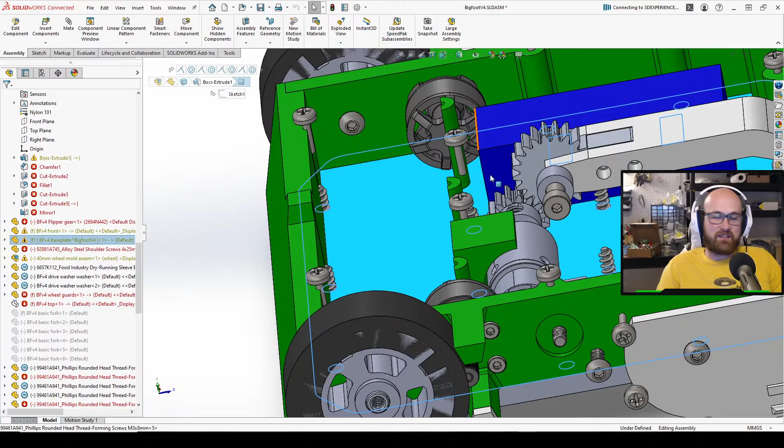Also, apparently I just broke everything. Okay, let me just fix this. Oh my god, what have I done?

That one I want to change because I was changing the side and I accidentally broke everything. Oh god, what have I done?

Oh god. Jesus Christ.

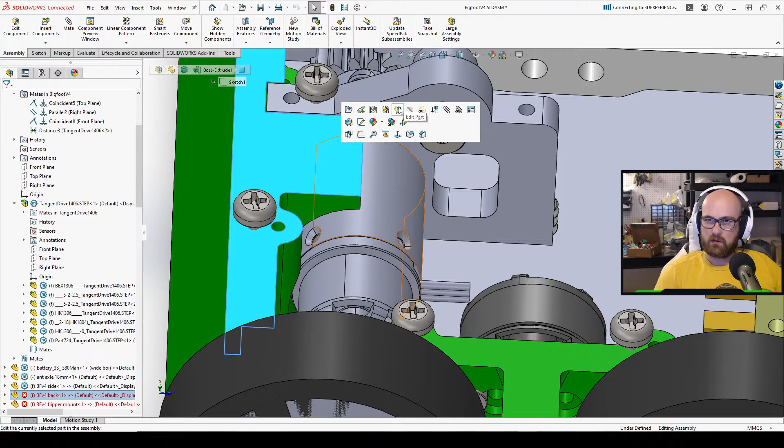I didn't realize anything was based on this motor. Oh no, what have I done?

I'm realizing I'm gonna end up moving the whole robot forward. That's interesting.

But because I used this as the center, thinking that everything would be, I guess it is still centered around it. This is fine. I think I just have to change this, it just has to not be symmetrical I think.

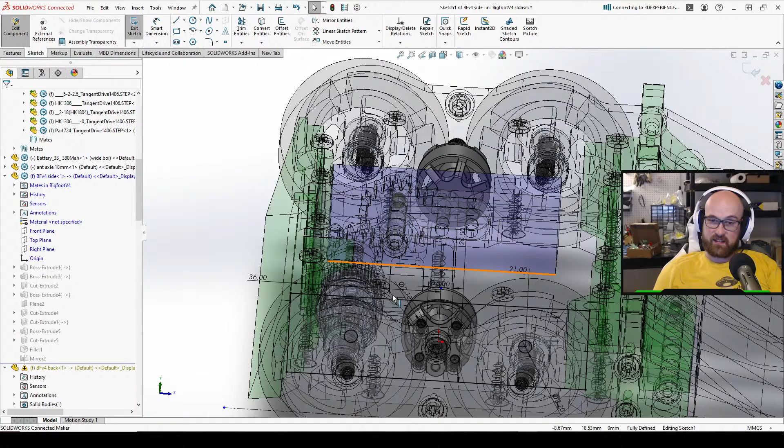Oh yeah, it didn't do so great, it went 2 and 2. There's a few things that I probably should have fixed. The 2 fights I lost, it got stuck with the forks on the wall, and then it got stuck on the back wheels, kind of like this.

One second, oh god, I still need to fix some stuff. Okay, it was stuck with these forks on the wall, and this was touching the ground, so the wheels weren't touching the ground. So I need to push the wheels back so they can actually touch the ground when it's like this.

And also, I accidentally turned on stall protection for the ESC for the flipper, so the weapon just kept turning off. That was a huge problem in the last event. That, and the flipper not going all the way down.

Yeah, I do need a... Yeah, I actually never got to use this wedge during that event, but... Let me see if I can do this without breaking literally everything. Yeah, I actually didn't get snagged too much with the forks.

Figure out... Oh, that worked, I think. No, that made that shorter too.

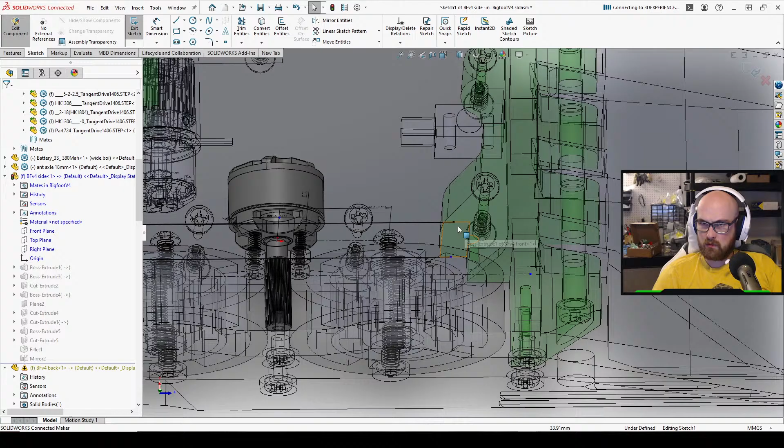Trying to figure out which relation is determining this. The relation to is this half that I'm trying to break, I think. So if I do this...

To be honest, kinda, I mean this uses brushless motors. Oh, that's not what I want to do. Because Necessary Evil Kit uses a gear, and I think brushed motors.

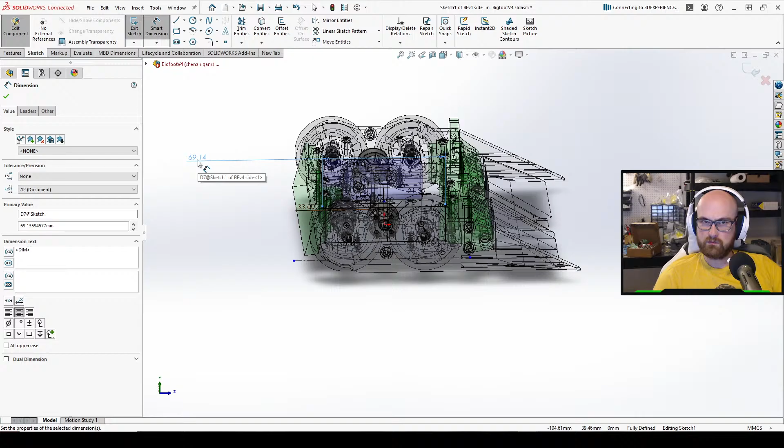Not exactly the cleanest way to do that, but... So I basically just broke different things. Although somehow this feels less broke. Okay.

You're gonna fucking lose it.

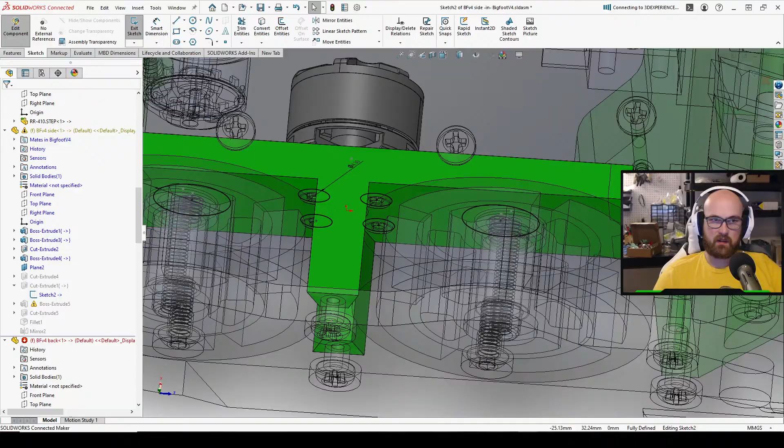The problem is so many of these mates are all so goofy. I just sort of didn't fix them.

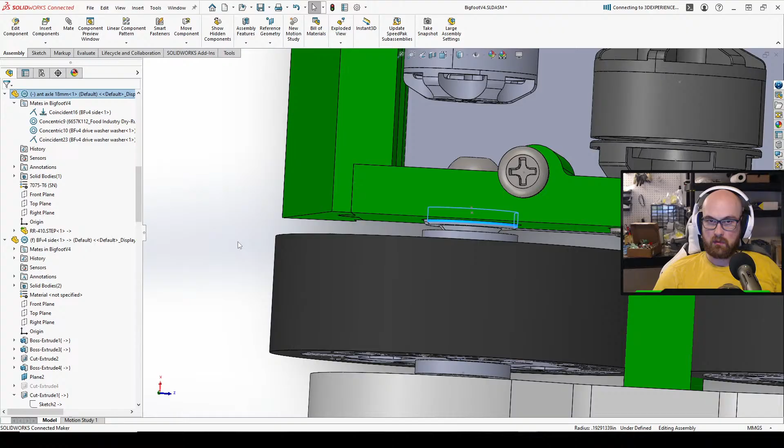That's now okay, that's concentric. Okay, so the sides are fixed for the most part.

Now I was gonna get rid of these because they seem to get more in the way than anything. I'm just gonna get rid of them, and they didn't really hold the robot together better.

Yeah, unfortunately, Bigfoot dropped in rank last weekend because the robots I went against weren't well ranked at all, and since I kept losing, I ended up only losing rank. Oh, I forgot to wake up, so I technically didn't lose any fights.

Oh, that's a rough way to not go to the event.

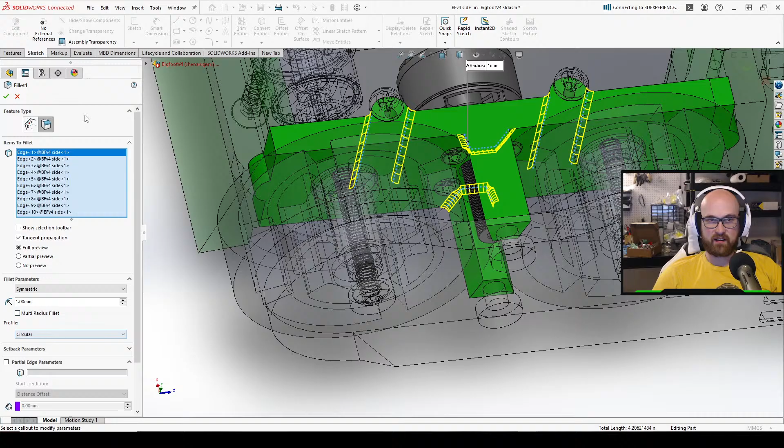Lost your sleep schedule. Yeah, pretty much. I'd be so upset. Oh, I couldn't only imagine. I'd be pretty pissed if I ended up sleeping through an event, or even through safety and whatnot.

Considering how much prep work goes into an event. Okay, so that's been solved.

Okay, what? Oh, I was using distance, wasn't I? Although I moved is 3 millimeters. I moved everything, that means I have to reduce this by 3 millimeters.

So we're still good. We're still good. Okay, now the question is, okay, this I have to.

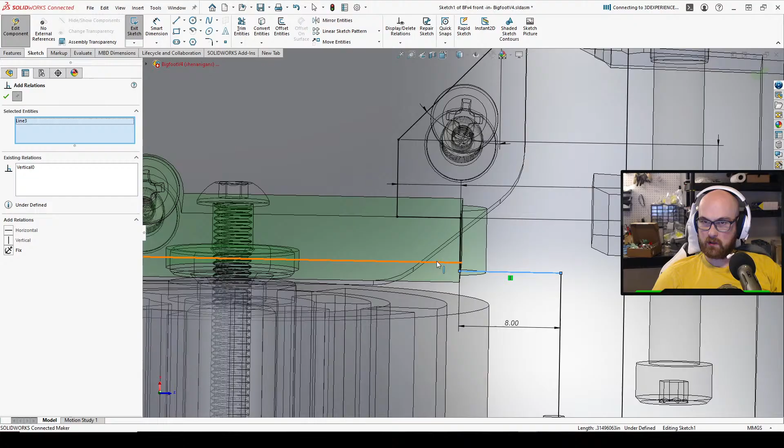Angry with me? Yeah, we're gonna reduce. I guess we could probably reduce this by. Wait, what? What?

Trying to figure out what the hell this is trying to do here. Okay, that's.

I think this should be defined by this instead. There we go. An event. Didn't unpack. Oof. Yeah, that's rough.

I may need to change some dimensions on here if that's... or I'd have to change some print settings. Yeah.

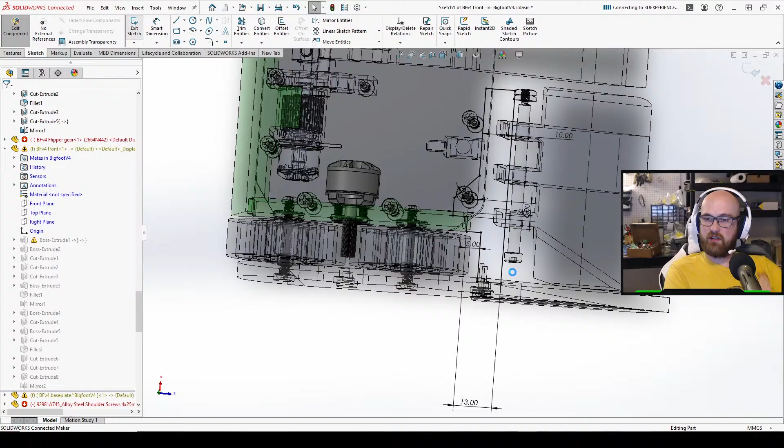Yeah, even when I have to basically just... why I don't unpack, like... Oh my god, that's thick. Think about that.

Should all be fine. We're gonna have to edit the feature because instead of doing up to surface, we're gonna do blind, because there's no reason for it to be that thick.

Okay, so I moved it back 3 millimeters. That should be enough, right?

Because I feel like there's still a position. I feel like there's a... I still reduced the angle.

I like how speedy it is, and it worked pretty well in the last event, the tangential drive. But I haven't really been able to test... I guess, how should I put this? I have concerns about how much torque it can put out, like the pushing power. But the speed and reliability has been pretty good so far. I had no drive issues.

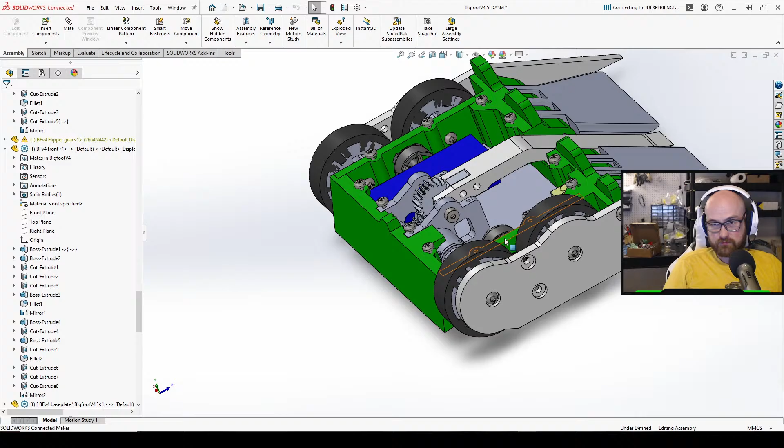I may need a little bit more testing before I really give a strong answer. And I do have doubts on if it'll scale up to, like, Beetle, because of what I mentioned about pushing power. But on an ant, it works pretty well.

Okay, so this is currently... I think this is actually good enough, because it is now currently... Oh, like the angle. I don't know. I don't think of what angle it'd have to be at to, like...

I just want to take a look at something. We're gonna just make a line, and then we're gonna make... I don't know why I'm using a center line. It's not like I'm gonna use this for anything. It's not like I'm gonna accidentally do a sketch. Oh, that's not what I want to do.

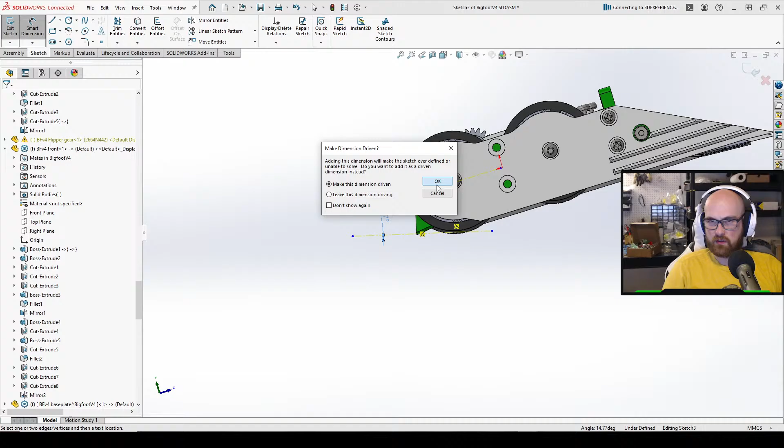But yeah, I think when I scale Bigfoot up to a... maybe that isn't... because that's a... make this driven. There we go. 14-degree angle.

Maybe I need an extra millimeter on that. We're gonna have to... I think I should only have to change one dimension if I do, because I think I changed everything else in such a way that... because if we give it 1 more millimeter.

Interesting, that only changes like a degree.

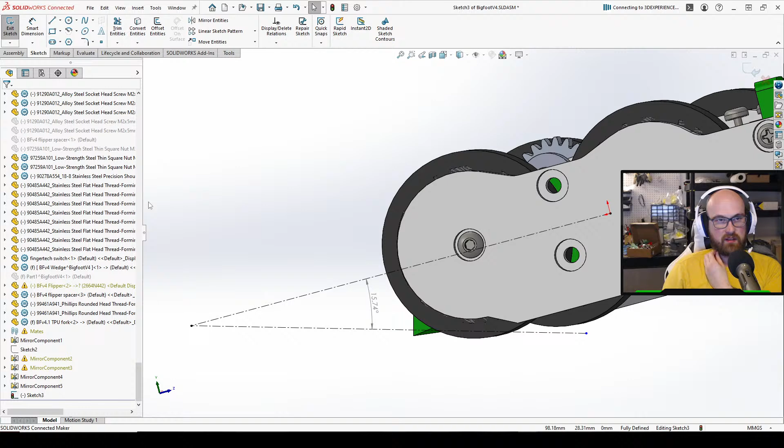How much spare weight does it have to make with the weightiest attachments? With the heaviest configuration, I'd like no weight to work with, and that was with a titanium top plate. I'm like 150, and that wasn't with the wedges. That was with like the little forky wedges.

Just edit. So with the other one, that's not how. The... let me delete the, there we go. Let me delete the line. I need to make this.

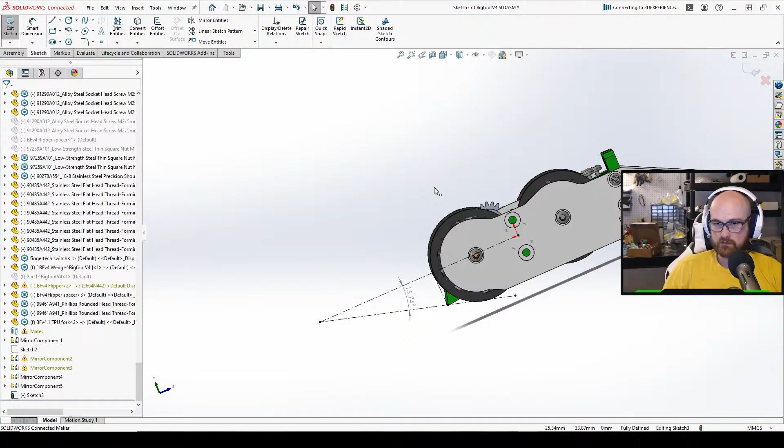Debating if I should just push this as far until this is almost hitting this can. Like these are touching.

I'd use TPU forks for ant weight, which don't use external springs. It's essentially just the springiness of the TPU. I'm not sure if anybody uses spring-loaded forks for ants. I've also not paid that close attention to who's using spring-loaded forks. I think also once you get to an ant weight, you don't have as much weight to do that sort of thing with.

Oh, I didn't realize I was still in the sketch. There's something else I really want to... let's just go to 30. We're going to make the wheels in the back. Actually, no, I don't think I want to do that. That's too much. We're already doing... 4 millimeters is already a lot. I think we're going to hope that's good enough.

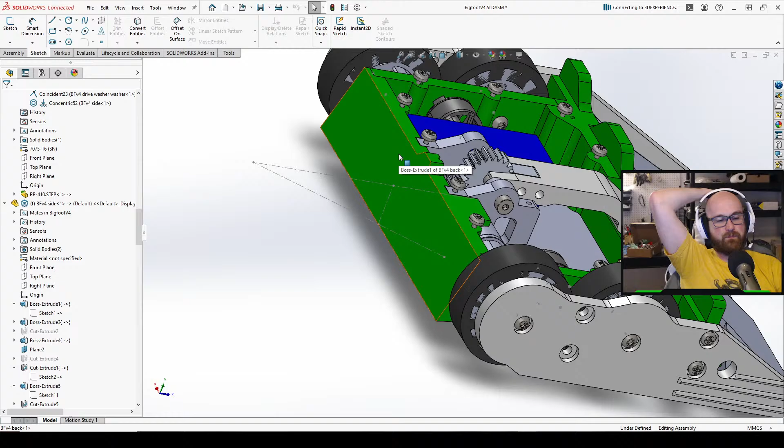Clutch, I don't know if I'm going to. We'll see. I think I'm gonna try to just remove... ooh, what the hell? I'll fix that in a second. I think for now I'm just going to turn off stall protection and then run it like that. And if I continue to have issues after I get rid of stall protection, I might do something.

Yeah, I'm going to try to get away with not doing that, but I will keep that in my back pocket if I continue to have issues.

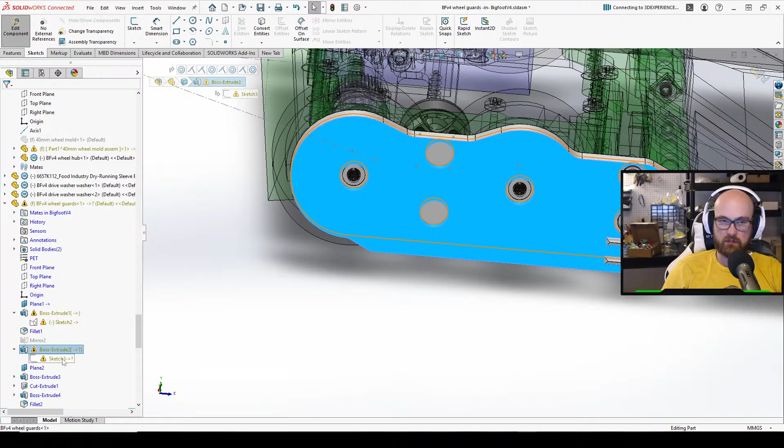Oh, I'm just gonna get rid of these holes anyways. What? Gonna not touch that. Oh, it's because these aren't equal to that. There we go, fix that. Okay. Those. Be good enough for now.

Now do some chicanery. So we don't have enough room for the electronics, and I have a creative solution for that. Actually, I don't think I need to say.

Fluke. So in addition to trimming some of the wires so that I am gonna... it would be named after another cryptid. I've made a lot of bots, and I always have another robot in the pipeline, and it's always a cryptid name.

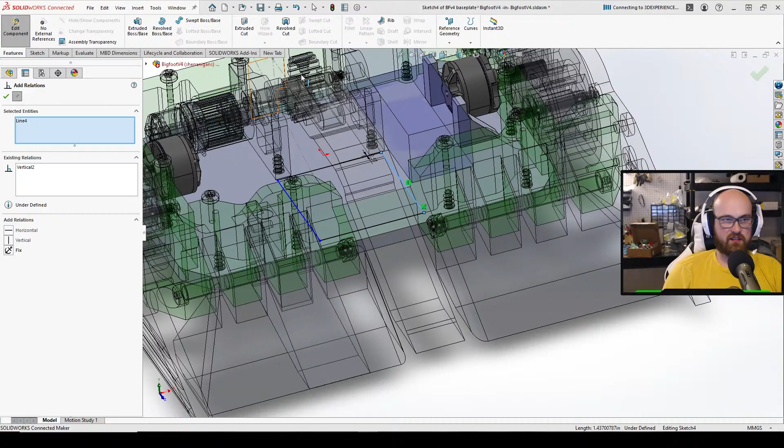I think Skunk Ape is going to be the next one named, which is another one of the many names for Bigfoot. Oh my god. But yeah, Skunk Ape is what I was thinking. Which is kind of a terrible name in my opinion, but I think that's why it's the right choice.

That's definitely going to break at some point. Definitely not up to any surface. Definitely not that much. Because this is a pretty thick bottom. Millimeters? That feels like a lot. 3 millimeters feels like I'm playing with fire.

Granted, if anyone hits this, I'm basically cooked. But I'm probably gonna have... we'll see. It's not. I don't... it's if it comes back, it's gonna be a dramatically different.

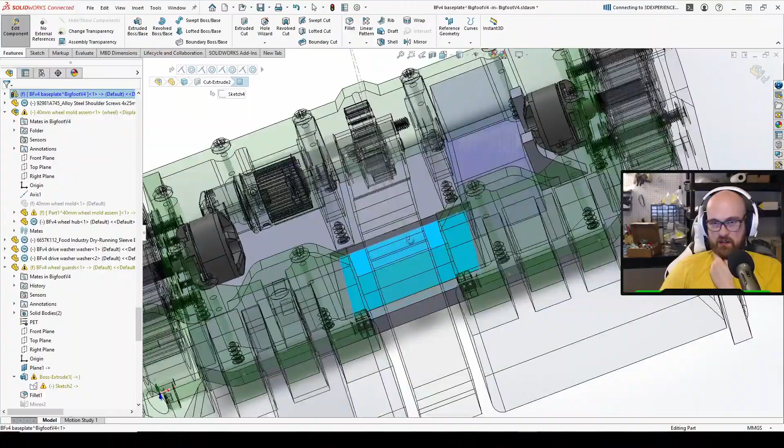But if I ever make another undercutter, it's just gonna be Wendigo, an alteration of Wendigo. I think Wendigo wasn't entirely too narrow. There was just some goofiness with Wendigo. But yeah, when I do this, that section where it's pocketed is probably gonna end up being basically 100% infill.

So for those of you that were worried.

Okay, now other thing I was gonna do.

Chaos splits, I'm not familiar. I've definitely heard of chaos splits, but I'm not thinking of it currently. What is it? Showing weird stuff. I'm gonna hide that for a moment. Okay. Chaos splits, I'm not familiar with that one.

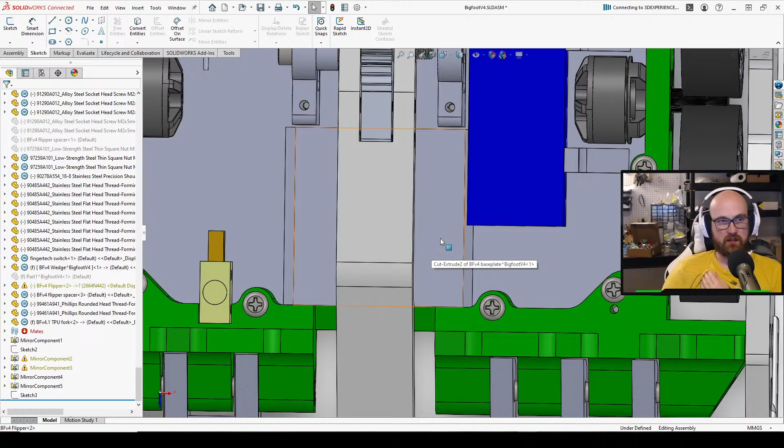But yeah, I kind of like the idea of making an undercutter. Okay.

I don't know why it's called Shenanigans. I don't remember what... oh, I think it was called Shenanigans because I did... oh God, no. Never mind. Oh no. I just realized I did all this in a configuration where I did Shenanigans and called it Shenanigans. This was supposed to actually be.

Okay, let me fix this real quick.

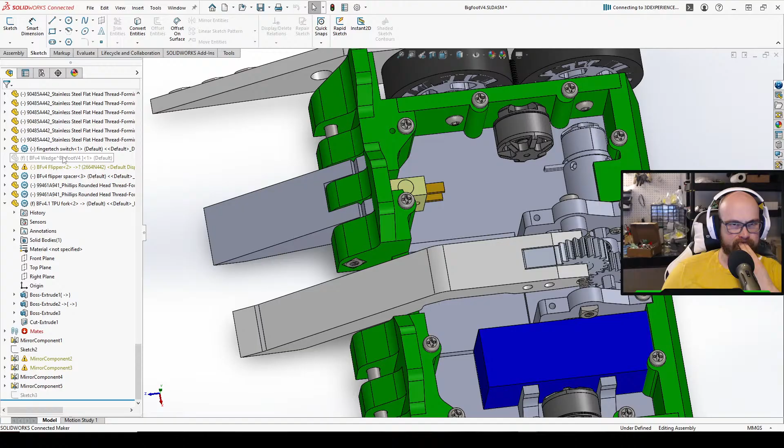I think there's a version of this fork that I made and printed, but I never saved.

Our four-wheel drive vertical killer. It sounds like a lot of different... wait, five. It sounds like a lot of different verts that I've heard of.

I feel like what every vert tries to do these days is be a killer vert with ground game. Wait, that's not what I'm... okay.

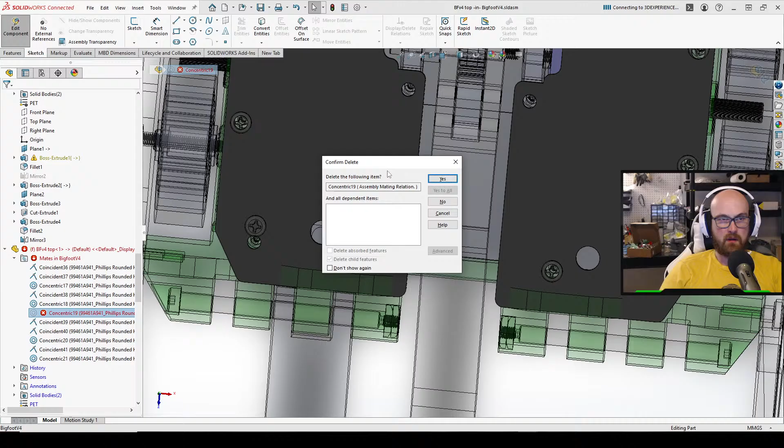Oh, kills the... okay. Four-wheel drive vertical killer with ground game. No, I meant the bot that kills vert meta. Okay.

Now I'm trying to remember what you're talking about. Okay, it seems broken. This is...

Sure what's going on here, but all right. Okay, that's weird. All right, but...

It seems like every bot currently is either a four-wheel drive vert or a reaction to a four-wheel drive vert. And I don't see that changing anytime soon.

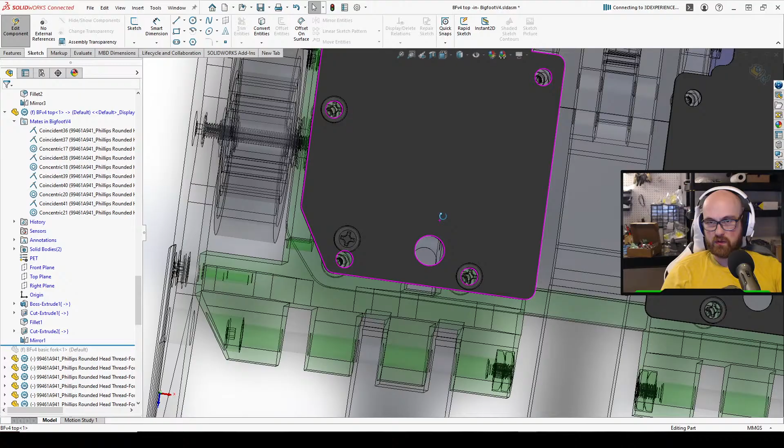Even like an important feature. Also, that looks a little bit naked, so... that a little bit. Okay.

Okay, I need to create a new configuration. Four-wheel drive egg beaters.

I'm pretty sure we have enough four-wheel drive egg beaters. I feel like saying you want more is a pretty controversial opinion, because I think we have enough of them, and I guess there shouldn't be a shortage of them. Actually, no, what am I doing?

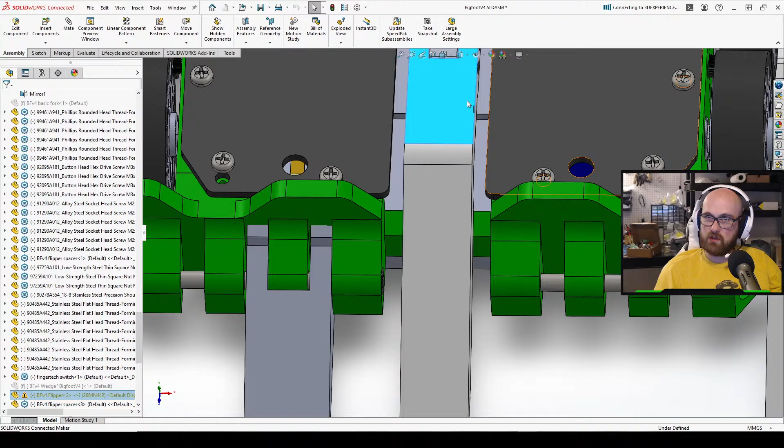Yeah, I feel like that ends up happening a lot of the time. You end up dialing in drive, which is kind of an important thing, and I think that was an issue I had with Hodag, is that I pretty much never got the chance to configure it. I never really got the chance to dial it in, because I was so focused on... not sure it's going up to yet. But yeah, because I had to focus so much on getting the actual robot to work, the drive always just had to be good enough.

So, for those wondering what I'm doing, I was basically creating a new robot based off of Bigfoot that is a vert. I originally wanted to use the weapon off of Hodag, until I realized the weapon off of Hodag is heavy as shit. And where's it? 28. I thought I had a 2822.

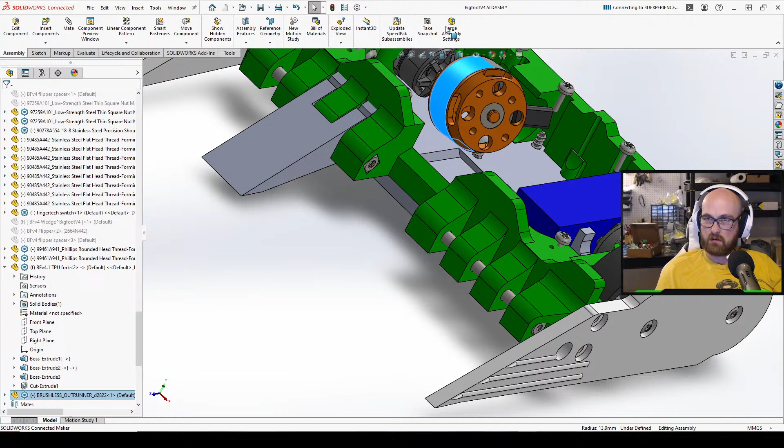Let me see something real quick. I feel like my driving at, what was it called? NHRL, felt a lot more reactionary than at some of the other ones. Because if you see my driving at, like, what am I trying to say, at SEMO down in St. Louis, is very different, or looks very different. Because the first fight at NHRL, I just wasn't driving straight. And then the second fight, I was driving a lot straighter, but going against Buzz Thrill, he was very slippery.

Okay. No, that's not what I want to do. Rename part, I think. Dummy. My music stopped. There we go.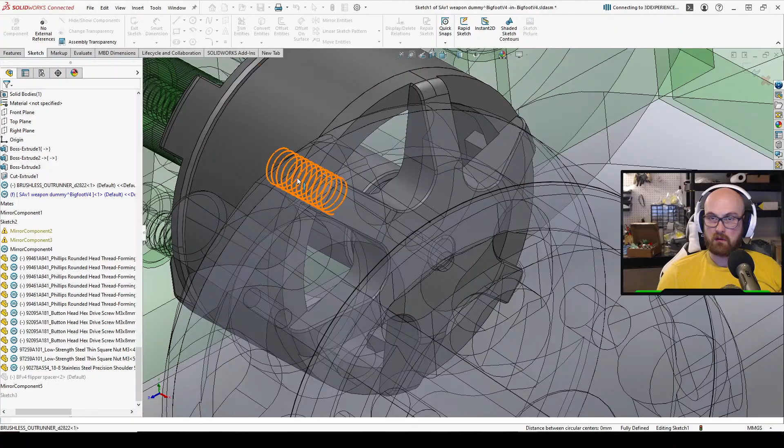Should be 17 millimeters. Other direction though. I'm gonna change the color to make it red, because that's just what I make these dummy weapons. That way it's also a lot more obvious that it's not a real thing.

SEMO was not where I was having the shutdown issue, actually. Actually, it didn't shut down at all at that SEMO event. It was Duluth where I had the most of it. And there was like one RSL where I had issues too.

It's going to have to rebuild every time I move it. There, wait.

Did I put a center plane in this in a good spot? No, in the center plane of this. But yeah, I wasn't having drive issues at SEMO, because the St. Louis one's where I got second.

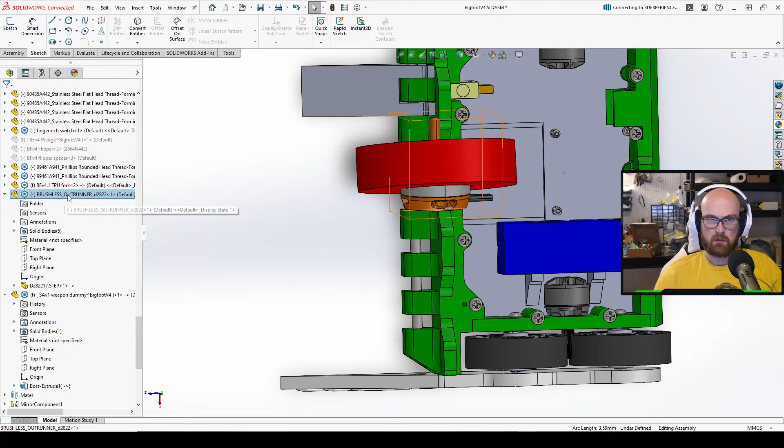Let me try some, I need to make a new sketch into this. Is it an inch to here? Trying to remember which part's an inch. No, it's an inch from here to here. Yeah.

Wait, I was trying to do something. So I wanted to create a new plane. Apparently, whenever I first did this, I didn't create a... Yeah, Duluth is when I discovered the issue.

Are you putting a vert on? Yep. Well, technically I am putting a vert onto Bigfoot, and I am going to call it a completely different robot when it's a vert. Not because I don't want to make Bigfoot a vert, but I want to use what I made with Bigfoot and do other stuff with it, if that makes sense.

And I'm going to call it Skunk Ape, because that's another name for Bigfoot. Because I don't like the idea of it being like, oh, are you going to fight Bigfoot when it's a vert today? I don't like that. Bigfoot's always going to be at least some sort of flipper or lifter.

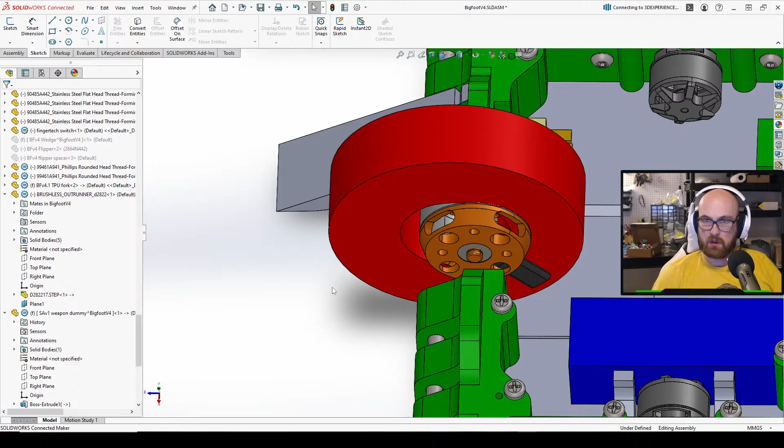I'm thinking about how I want to mount this. I think I'll mount it kind of like that. I need to create another plane, because apparently whenever I first did this, I didn't really do anything smart when I made the mate. I didn't actually create it, I guess.

Yeah, I think the best way to do it is to not use the same uprights. But that's just my opinion.

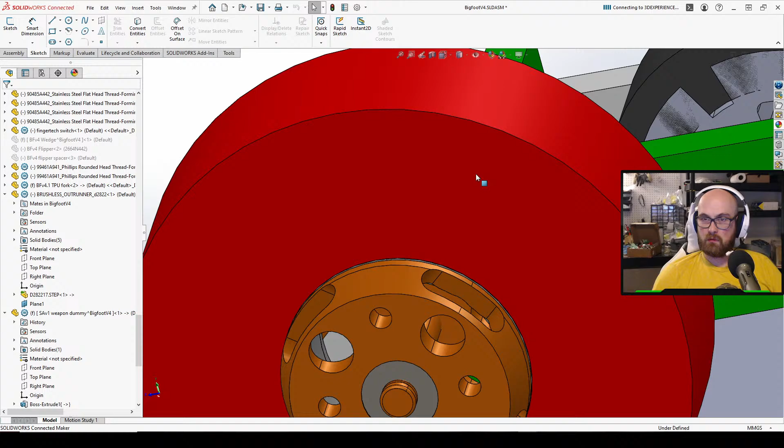Not what I wanted. Let me hide this for a second. The front plate.

So I'm debating, I don't want... I think it's going to end up having to be a bit forward because I don't want to have to cut out of the bottom plate. Yeah.

Thin repeat hub. Yeah, the thing is, I could probably do that. I might end up doing the repeat hub, but I didn't account for the weight of it. So if I end up doing more with Skunk Ape, I'll use the repeat hub. I just didn't feel like cutting out because I would have to get new weapons cut, since the weapon on a Hodag is like 3/8 of an inch, and I need like 1/8 of an inch, which would probably be better.

Yeah, you should be... well, you should be. What's that? What do they call that when you're working on something with someone else, and they're working on something at the same time? You need to be like co-working - we need to be working at the same time. This is supposed to be your motivation to actually be doing it. This is the exact time you should be working on your robot.

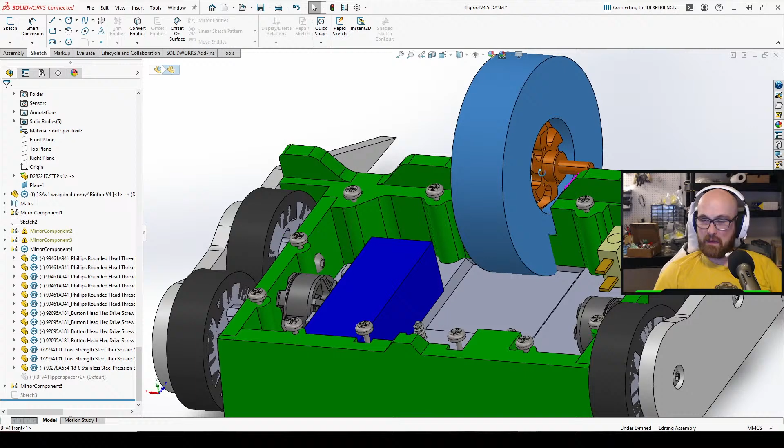Okay, so I may have to cut out a little bit out of the bottom, or the weapon's just going to be entirely too far forward.

Nice, what's the new beetle? I'm trying to figure out how I'm going to make this fit, because I already knew I was going to have to do a different front. Am I going to need a new side too? Is the only thing that's going to be the same like the sides and the backs? Because I could probably just do a new bottom.

The spreadsheets are telling you it's impossible. Oh no, you gotta listen to the spreadsheets.

SRO is going to the RSL September event in Nebraska. Okay. Yeah, I'm trying to bring both Skunk Ape and Bigfoot to the next RSL event, because the next RSL event is going to be my next event. And then I'm going to try to go to that one in the Chicago suburbs.

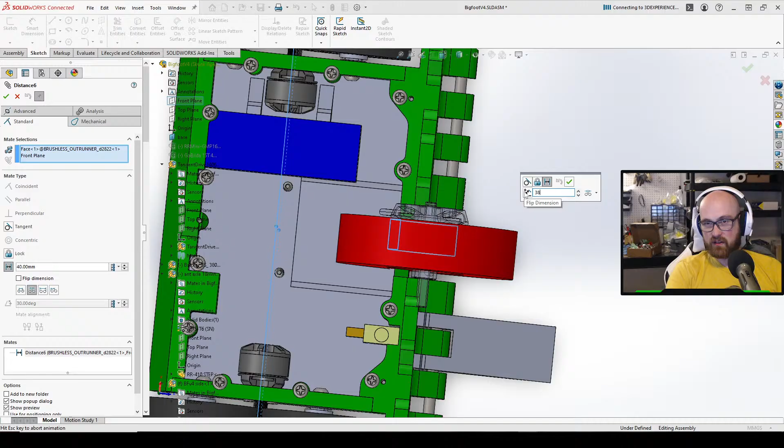I think I have to bring this closer to the center of the robot, mostly because I just pushed the drive back.

I've never made a normal vert - this will be my first normal vert, and it'll just be me slapping a vertical spinner onto this. So this will be fun.

Trying to... yeah, because I'm mostly concerned about where the weight sits, that's my biggest concern.

Yeah, I guess I'll have different bottoms for each of them, and the main difference will be that, if need be, I'll just cut holes in the Bigfoot one if we get desperate.

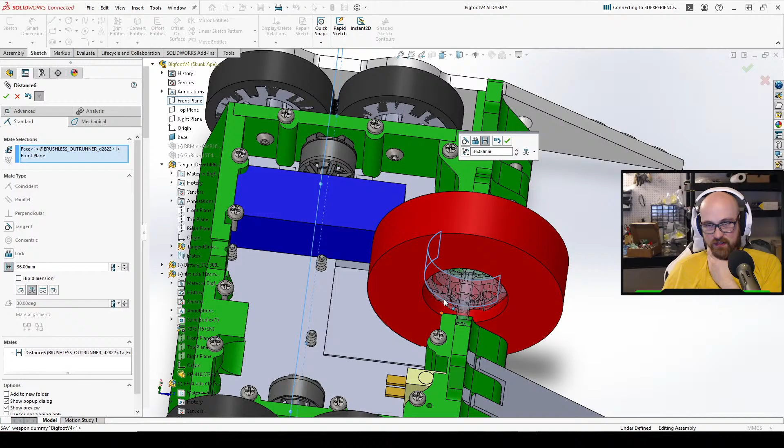Your Discord message said SRO. Said SRO. Unfortunately, I didn't realize.

Oh, this - oh okay, that looks a lot like Doppler. Showing the CAD without showing everything on my Discord. So it's both of those - it's both a vert and a horizontal.

Big Teak. It's a fine weapon, I guess. I don't think it's gonna be as good of a hot swap as I thought - as Big Teak is not gonna...

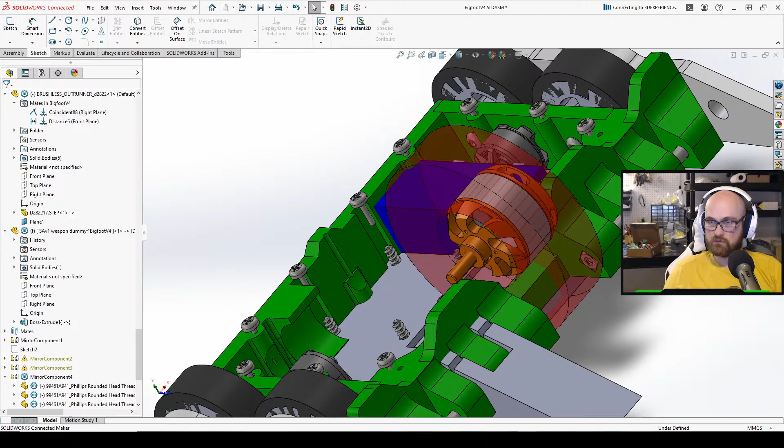That to the... obviously not tangent to it. Do a distance mate. Do 6 millimeters from the bottom, maybe. Good enough.

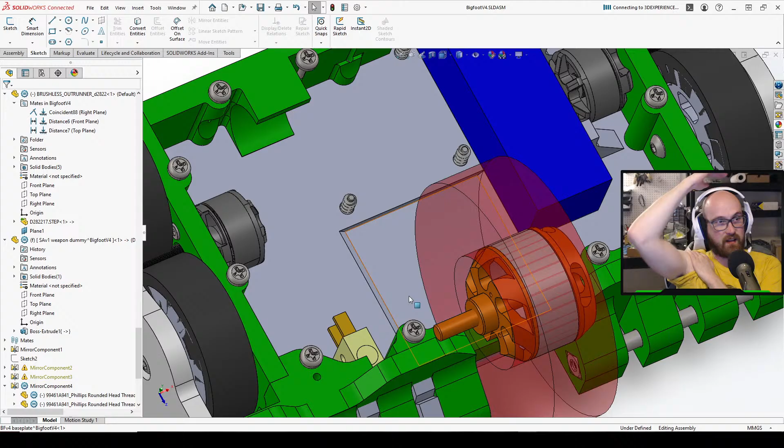I did the math on how much weight this is gonna require. This is gonna add about 80 to 90 grams. And then the flipper is like 60 or something, so I'm gonna need to find 20 to 40 grams depending. But I also have to get rid of part of the front, so I'm not too worried about that, since I'm gonna be using a completely different front.

Not completely different, because I want to be able to use the same forks.

So I think for this, we're gonna edit this part, and then I'm definitely gonna add a configuration to this, because I essentially want... I pretty much expected that this is going to... I can't have the front for the flipper be the same, because of aspects of the front.

I don't think I'll be able to use all the same forks. I might be able to use some of them, because I want to keep the same spacing, but I think I'll only have 2 of these, so I'll basically only be able to use this sort of fork. So we're just going to suppress that for now.

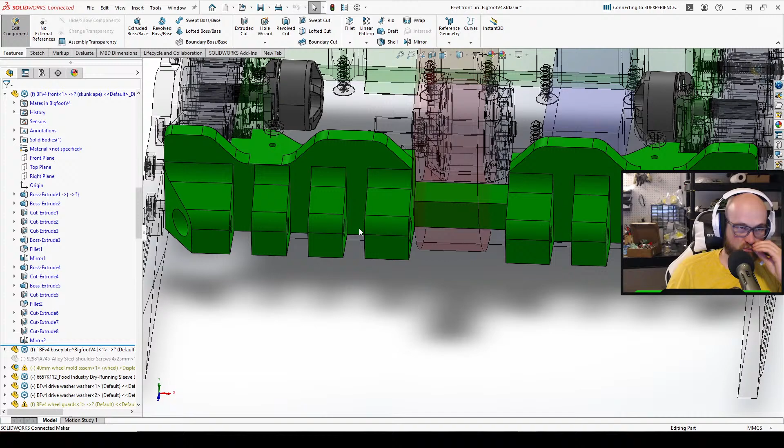I don't like how messy this is going to be. Okay, that didn't break nearly as many things as I thought it would.

It's going to be Bigfoot flipper, or is it? I knew something sus was going to happen. Yeah, I don't even remember... The thumbnail was meant to be for something that was a while back. Flipper, is it? Yeah, because... I think this...

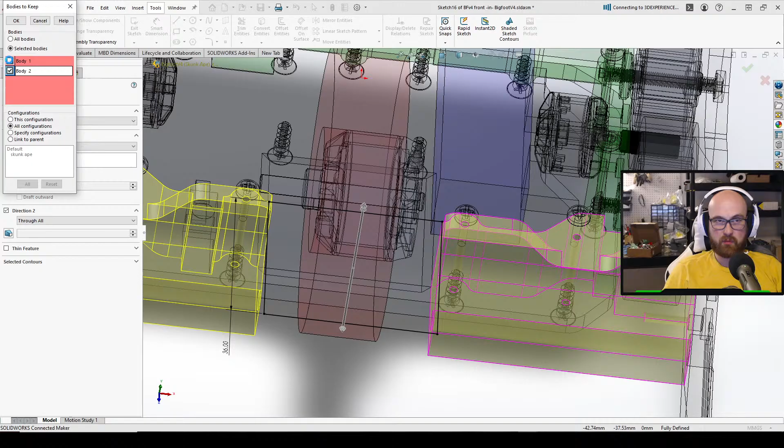Just do through all both. Shh, see, we're already saving weight. Keep both bodies, all bodies. They're no longer one body. Shame. I'm sure in no way, shape, or form will that come back to haunt me.

I didn't mean to show this. Trying to figure out why it was. Okay, let me just finish what I'm doing.

But yeah, I could never make Bigfoot not a flipper. But wrong direction, what are you doing? Oh okay, direction, there we go. A better name. Skunk ape?

Well, it's honestly supposed to be kind of a dumb name, because I feel like it's kind of a dumb idea.

I would not... actually, think about it. I changed my mind on this one. I guess I could probably use all the same forks if I really wanted to.

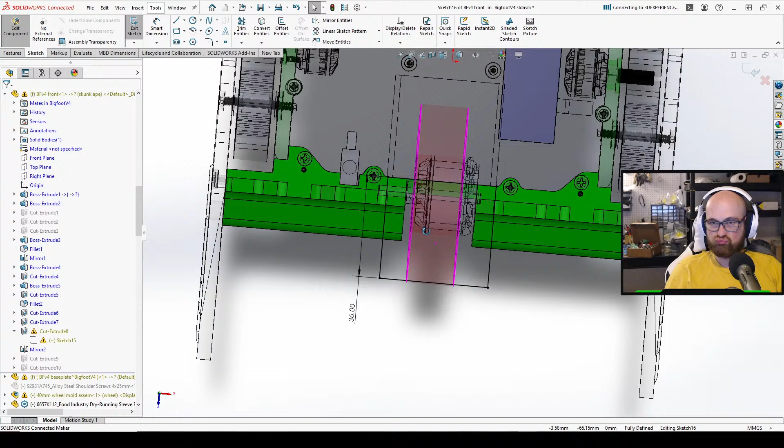The poo monster? It's not gonna... okay, not quite that goofy of a name. The poo monster. Although that's what it kind of sounds like. It sounds like a terrible name. So the skunk ape, like it sounds like it's gonna be a stinky robot, which it probably is gonna be a stinky robot, but not in that way, I guess. That's not the way I hope it to be stinky.

No, I don't think that's where I want that to be. I want it to be further out. I think I want it to be in line with this, actually.

Yeah, I research, I like to... the poo monster. Let me try that. Okay. Interesting. The most mysterious cryptid, the poo monster.

This does feel like a joke name, though, in a way. My phone is blowing up, I'm getting texts. Okay.

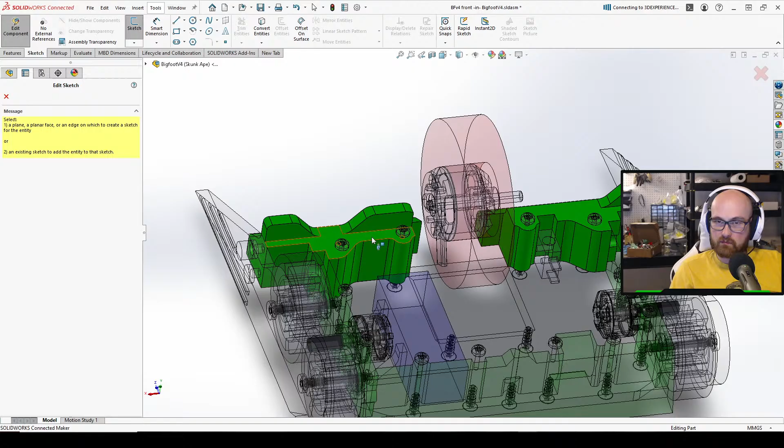Yeah, this is... because I remember whenever I'd look up different names for Bigfoot, skunk ape would always pop up, and it always felt like the goofiest name. I'm like, so this is the goofiest version of Bigfoot.

Tacking on stuff. Maybe I want to keep those, maybe I don't want to suppress that or cut that off, because that could end up being... no, that's going to get in the way of me. Like this, there's got to be screws that got to go somewhere.

I realize I need to, in some way, shape, or form, make this set in one way. So we're gonna... I'm actually gonna do it at a 45-degree angle from that, that way the wire's going straight down, basically. Okay.

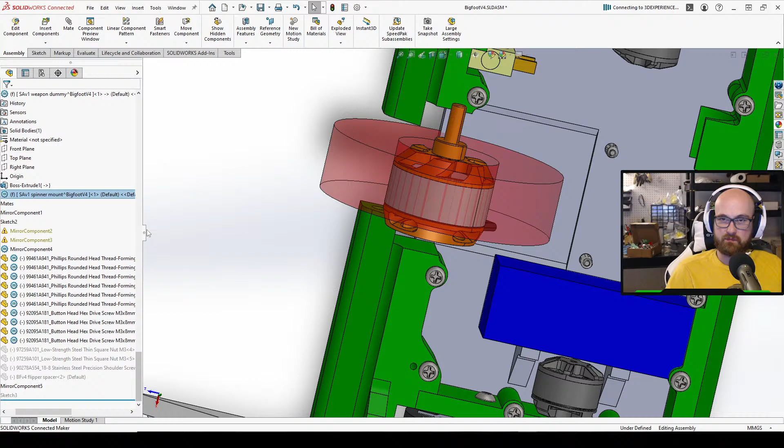Maybe not the most problematic association, basically an abbreviation, but probably not the best.

Actually, now that I think about it, I don't want this. The screw currently is in line with... I think I actually want it to be a little bit different. Let me change this angle.

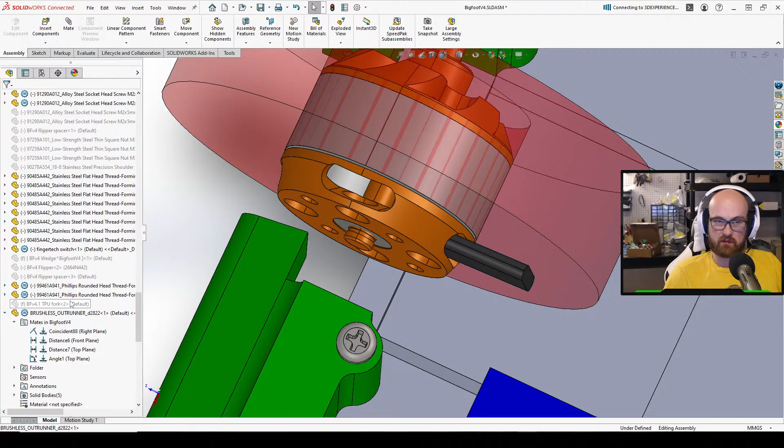Okay, where was I? Other than doing chicanery.

Vapor Lock, Project Beta, Rough House, Nebula, Space Manta Ray. Space Manta Ray a reference? Or no? Okay, convert entities, these.

Because this is going to be our furthest approach, I'll probably go with this one.

Okay, that's going to be in line with the top, that way we can mount it to the top. We might end up doing a new top, but we'll see.

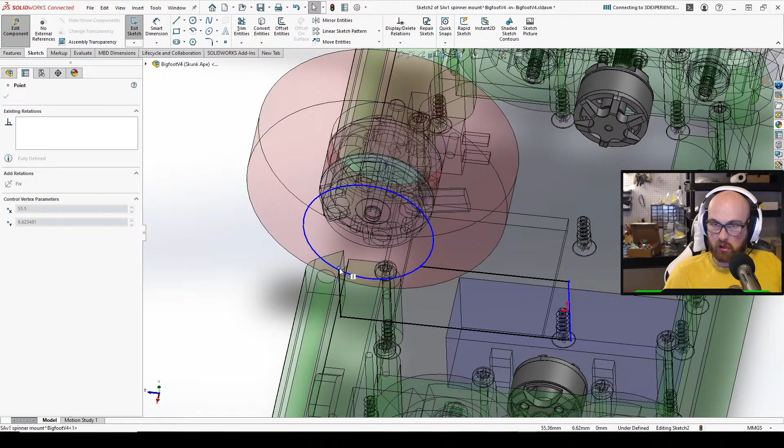Coincident. I think we'll make this about the size of the can. 28, I guess, is the size of the can.

Tasty Plants thing, also kind of a cryptid. Ah. Space Manta Ray, okay.

Whoops, I don't want to do that. I'm not quite done yet.

Oh wow, I don't like that, it looks goofy. We need to just make this tangent to this, and then we can adjust the angle.

60 degrees is a good angle. That's right, it's a respectable angle that makes a normal, respectable robot would have.

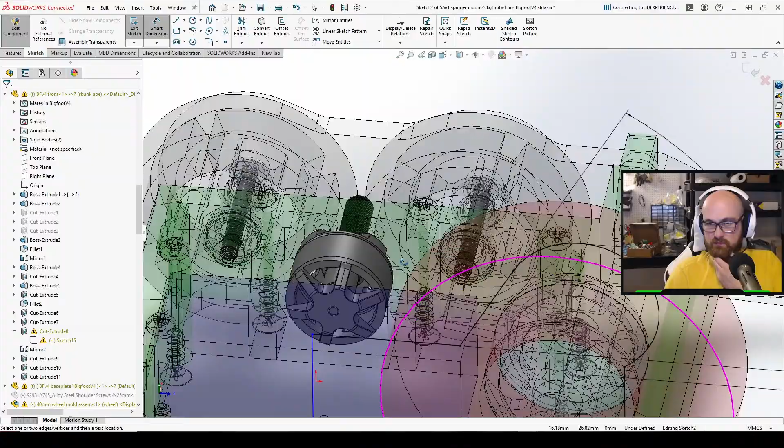I guess I could have the mounting for this just fit in the little pocket I just made. I'm sure there's no way that'll come back to bite me in the ass.

Get rid of that. Well, I'm trying to make this all fit into there.

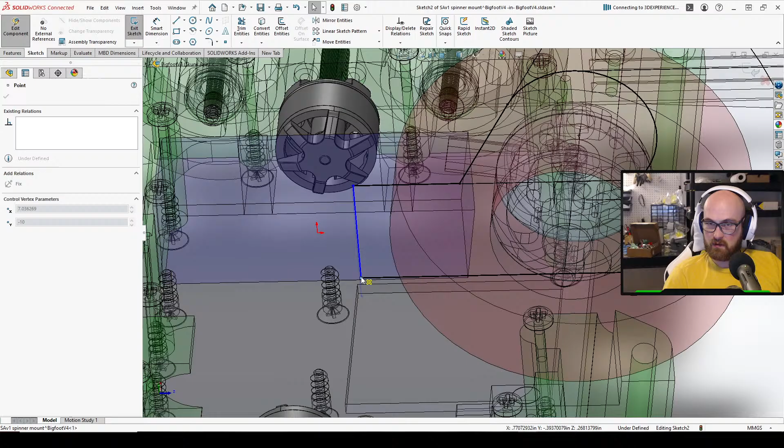We're just gonna do a new base plate, we're not gonna fuck with that. And not a socketed base plate, because that's gonna create a mess. Although I think there might still be, I might make holes for both just in case.

Oh my god, that's kind of funny because they aren't real. Yeah, I do think that because it is a lot easier to make video game robots. I've made lots of things in video games, but it's different when you actually make them. Actually, I haven't made robots in video games, I should specify. I don't know where I was going with that. I'm trying to focus on too many things at once.

What am I doing? I feel like I made this too... that's the problem.

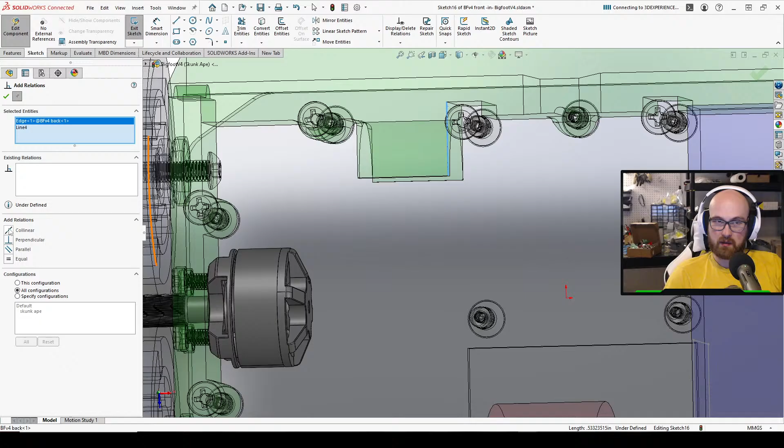I messed up, I did this cut wrong. Not that cut. Because this wasn't meant to be that deep, it was meant to be in line with this, not that face. Because otherwise I'll end up with uprights that are way wider than I want, way thicker. I was like, I knew I was getting 2 plus 2 and I was getting 12 and not getting the right number.

Okay, now I can go back to fitting that in there because this is the thickness it's supposed to be. Don't know if this makes sense, but this is... I feel like a lot of things I'm doing right now don't make sense.

Make this vertical and then we're good, Bob's your uncle. I think it's 6 millimeters? I think it's 5 millimeters is what I made it. Yeah, they'll put it right there.

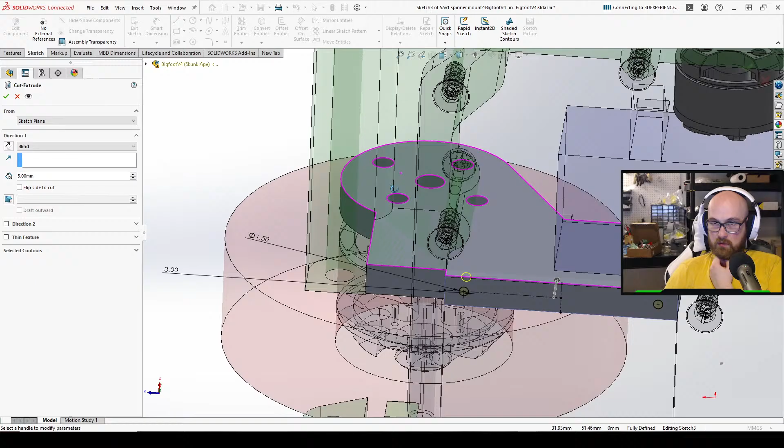Okay, then we'll mirror this a bit. Nope, we want to go 10 millimeters deep. Go here.

Baby Nautiloid. I've not, because I know the robot it's based off of is really good. I don't know if I've seen the actual people running the kit or what the difference is, because it seems like it's pretty good. I don't think I've personally seen it at an event, so it's kind of hard for me to say anything about the Nautiloid kit. That sounds about right, 400 sounds about right. I know it's - that might be why we don't see it that often.

Also, this YouTube song does not need to go this hard.

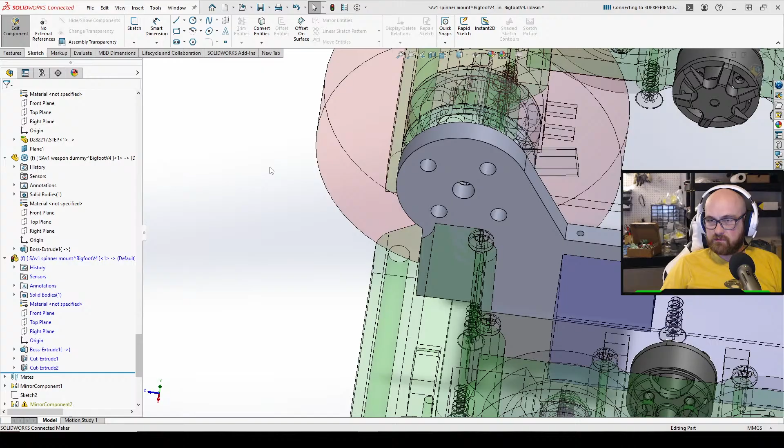I feel like building ants when you have a 3D printer makes, saves you money. Once you make the cost of a 3D printer, building whatever ants you want becomes so much cheaper, because Bigfoot is almost entirely 3D printed, which makes my life so much easier.

Do that one, not symmetric - asymmetric. If anything, I want to do it the other way around. We're doing weird stuff with the chamfer because I realized this has no reason to exist.

$322 - ooh, all the parts? Is that including electronics and stuff? It's pretty cheap.

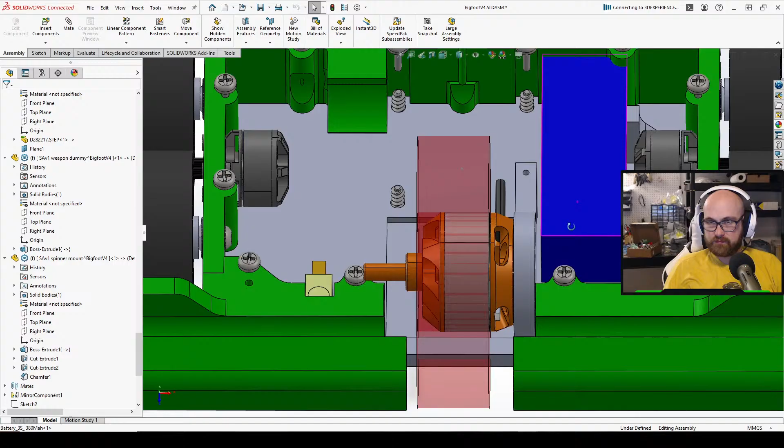Why am I doing this on the left side? I do everything on the right side, but for this, I decided to do it on the left side. It's fine. That's not right, I would need to fix that real quick. Let me - okay. Okay, now we're good.

I'll be surprised if Skunk Ape doesn't suck. I think that's all the features I was going to add. Oh, I need to pocket some stuff because this - let's be real, it does not need to be solid.

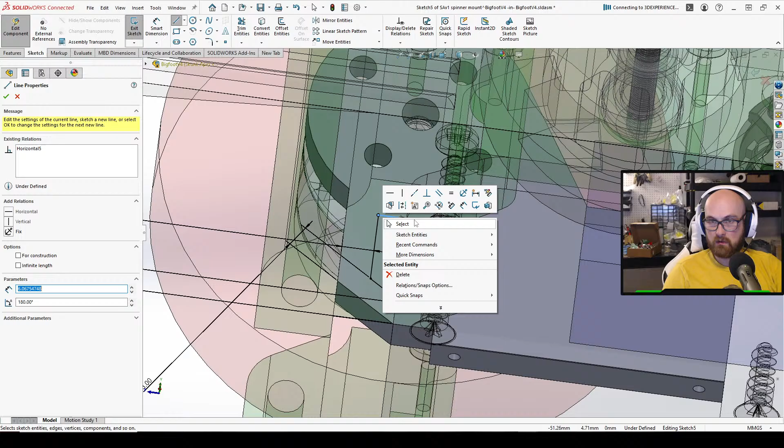Actually, now that I think about it, yeah, doing some goofy shit. Make that parallel to that. Fine, good enough, whatever. Let's make these equal just to make it look like I know what I'm doing. Next, we're gonna do some triangles.

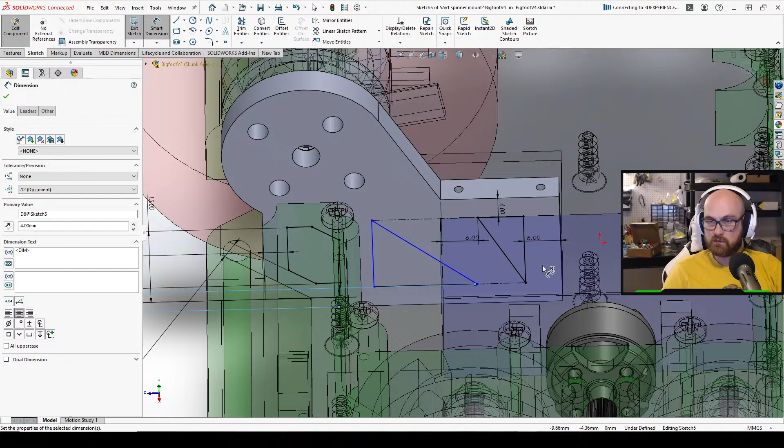A center line going from here to here to keep it all in line and pretty, same thing here. Alright, I'm doing this so that whatever - should actually, wait, I can't do that. I'm putting a hole right here. This will have to be about 6 away from that. Four there, 4 from that. Give that plenty of breathing room. Just make that smaller. That looks like goofiness, but it'll work.

And then we'll add a little bit of fillets just to make it look a little bit cooler, I guess. Well, actually, to eliminate any stress concentrations, or to minimize any stress concentrations, I guess. Whoops.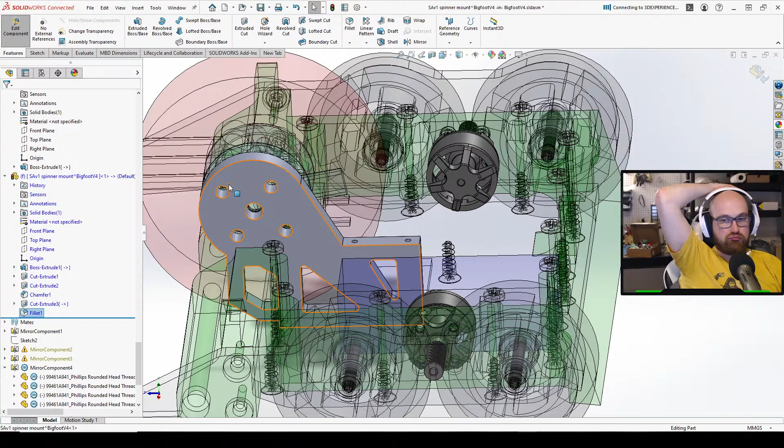I don't really understand how people can say it's easy to do combat robotics and then say to spend $400. I mean, $400 is a lot for a lot of hobbies. It's definitely not the most expensive, but it's also not the least expensive. I've spent a lot on Hodag, a couple thousand on Hodag. Also, easy and expensive are two different things.

Bodies, mirror - no, mirror bodies, don't merge the solids. And then we'll be amazed if this thing doesn't explode in the first fight.

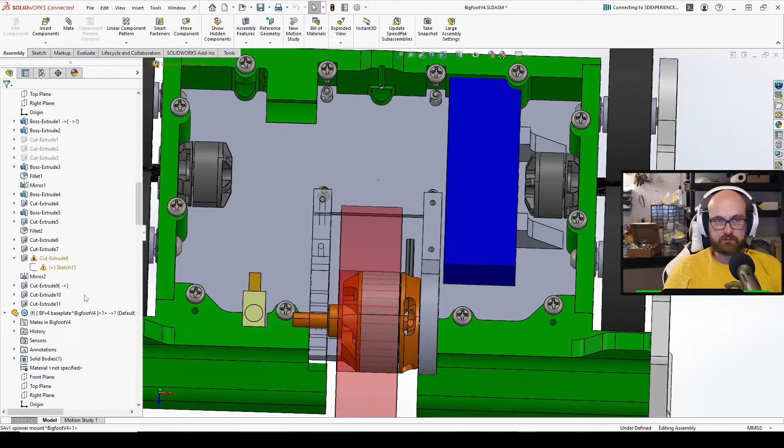We'll just do a separate Skunk Ape top, and then I think I'll call it a night, because this is the longest I've streamed in a while. I don't usually hit 2 hours, but I need a top plate.

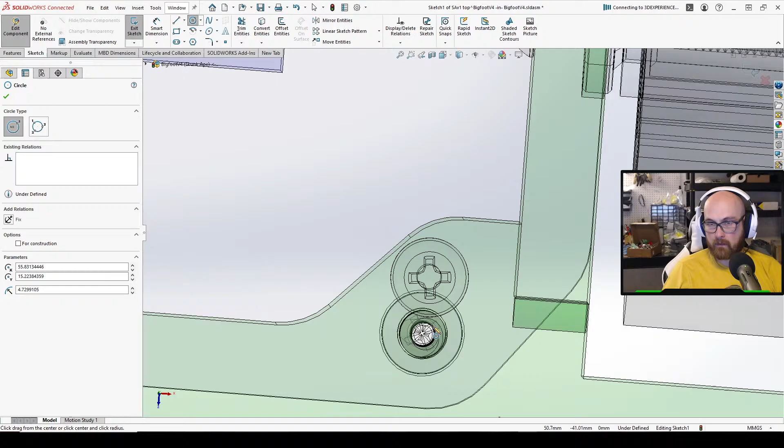But yeah, honestly, I definitely lose more parts to me making new iterations than I do to actual damage. Damage is typically pretty cheap, but I keep wanting to make new iterations after every event. And that ends up, especially with 3D printed parts, that's where all the 3D printed parts disappear to.

Come on. Oh my god. There we go.

Then we're going to use one of these to do four. Okay, I have slightly different uprights. Oh, that's...

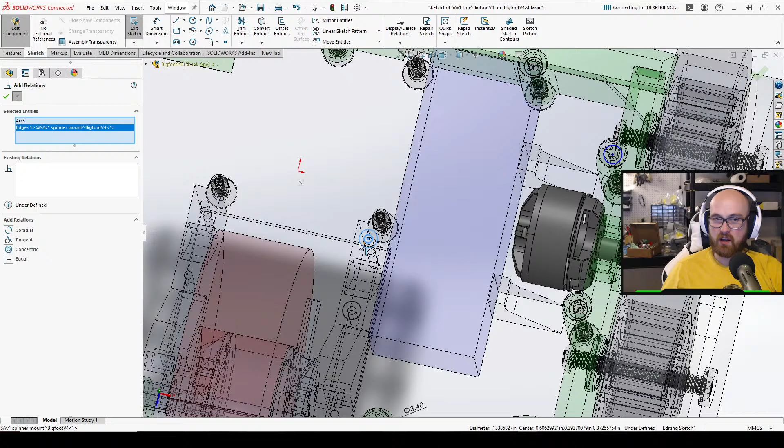Yeah, I've got a lot of parts that are... What's rough is on Hodag there's so many parts that are just barely different, and it's like, ugh.

It's always rough when you can't tell the difference. You're like, wait, do all of them? And then it's like minute differences, and I don't realize it. I'll grab an old one and I'm like, fuck.

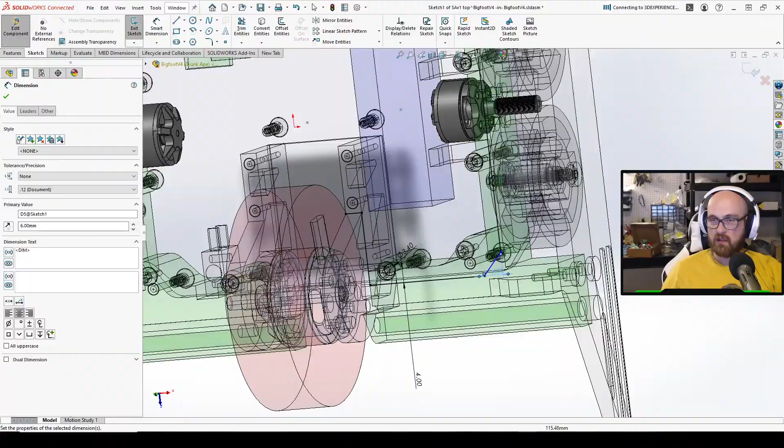At the last event, the Iowa event, I switched out one side. That was all the damage I took. Or like one, not a side, a wheel guard. One of these wheel guards barely got damaged. And I brought two of everything, and three of those.

Nope, that's not what I went to. There were a few things I actually had way more than two sets of — wheels.

I've been making wheels like a fiend. I am never gonna have to worry about wheels for this. Well, I say I'm not gonna run out of this type of wheel. I'm probably gonna make a change to the robot long before I need new wheels.

Mirror it all. It almost feels fitting that I'm doing this one backwards.

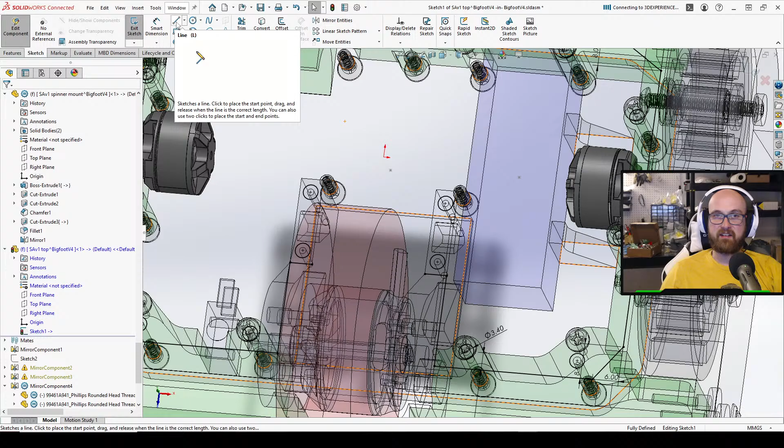Because the music is very much random. Cat sounds smashing a piano. I mean, this is all random YouTube music. This is all like all the music that YouTube said, hey, you can use this so you don't have to worry about any copyright. So that's why we're listening to it, because I just don't feel like dealing with that. Even though I'm nowhere close.

That is a little tighter than I would need it to be. Make that an 820.

Okay, that'll be our top plate. We don't need it 10 millimeters thick. Three is plenty. Three is probably more than plenty. But you know what? P is for plenty, you know what they say.

Oh, this is goofy. This is a goofy robot.

No, I never finished the front. I'll probably do that on my own time, though. Or I could unsuppress that stuff, I guess, because I didn't cut into it at all, so I could... That's why I never finished it.

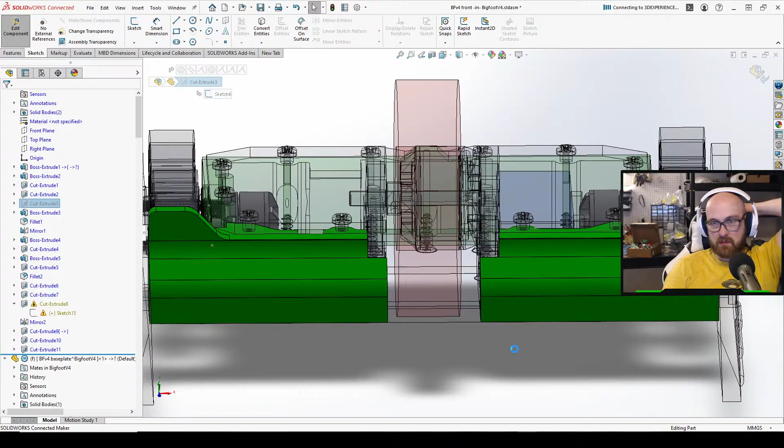But yeah, I can use all the same forks as the other one. But I wasn't sure I was going to be able to do... I guess if I had to push the motor out more, I could probably even... Oh, I need to cut out the bottom too. But this is the gist of it.

I could have almost made the weapon a little bit lower, but I don't know if that... Oh, and I should probably put ears on it, but...